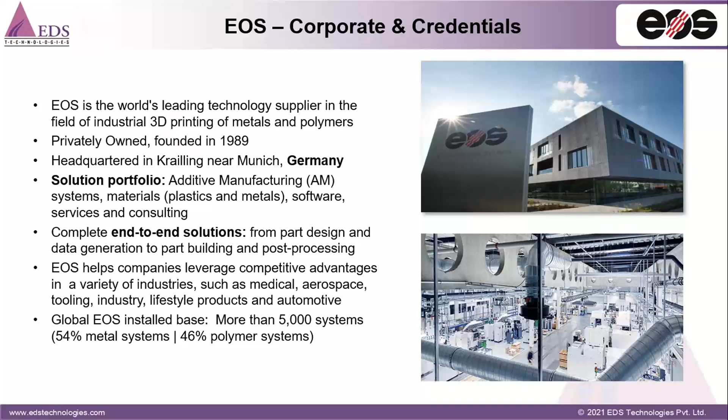Here I just want to emphasize one more point. They recently started a new plant with a capacity of 1,000 systems per year to address the market needs and increasing demand across the globe. This setup is now serving not only with machines, but also giving certified equipment to customers based on country needs.

I would like to introduce how our technology works, the principle of additive manufacturing in our solutions. Here we use the laser sintering process, predominantly for both polymers and metals.

In the laser sintering process, once our CAD model is ready, the geometry model is imported into the EOS AM machine. It has inbuilt software which can read CAD models in STL format, and the complete STL data can be sliced into particular thicknesses. Based on my quality needs, I'll slice the components and print the part layer by layer using the sintering process.

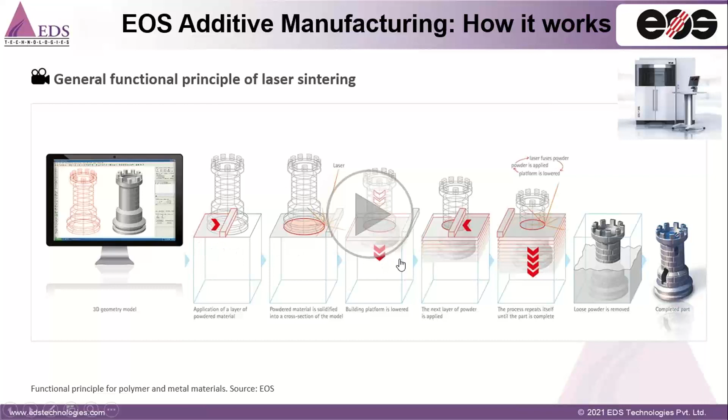So here you can look at the component. Once I take the CAD model, it will be sliced vertically into different layers. Layer thickness can be defined based on the quality needs and surface quality requirements of the parts. Once the component is ready, the machine will read the first cross section of the part and start building the component step by step. Let me illustrate this.

First, look at the chamber, the powder chamber. Initially the powder coating, the material powder—it could be metal or plastic—will be spread into the chamber, which we call a recoat. Then we warm up the material to a particular temperature. In the case of plastics, I'll warm up the chamber, since the utilization of the laser alone is a costly affair.

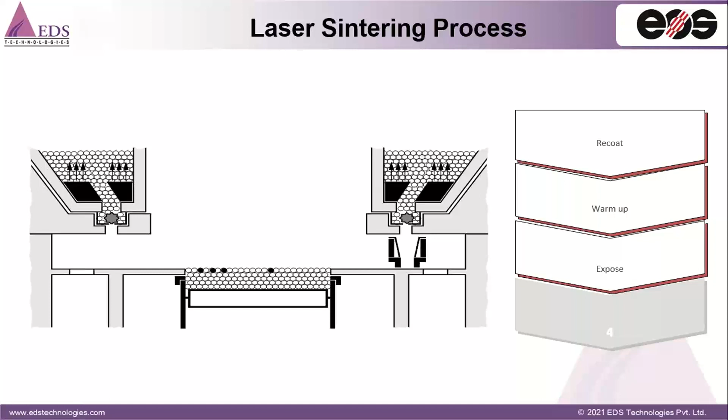So what we do is preheat the materials to a particular temperature based on the material characteristics, and then start using the laser by reading the cross section from the CAD data. It starts exposing the laser on top of the material, which melts it. Once one layer of the cross section is built, the build chamber goes down by another layer, and material is spread on top of the first layer. Then the laser process happens again, and both layers solidify together.

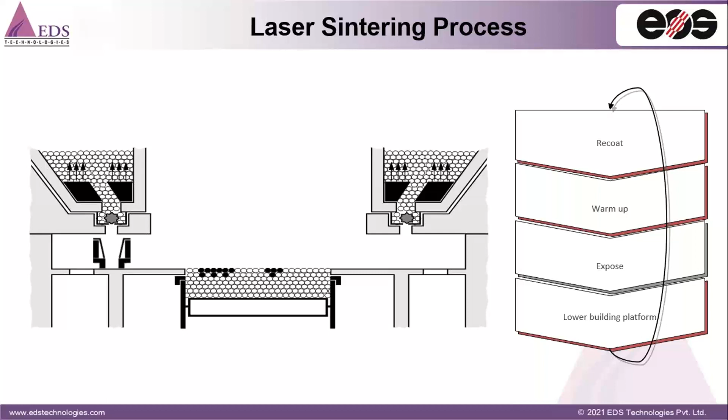The complete component is built in the chamber. Once my component is ready, I remove the part from the chamber and carry out post-processing activities. So in short, that is our principle of working with laser sintering technology.

I would like to emphasize why additive manufacturing, and what the roads to success with it are. First, the major challenges with conventional manufacturing: one is we have to work with limited complexity. I cannot produce the component the way I think or the way the part demands—that is the key problem with traditional or conventional manufacturing methods.

The second challenge is the number of operations—because of limitations, I may need to produce more parts to carry out assembly processes. To eliminate that, here's an example from Hettich: the washing rotor, a 32-component assembly, is built with just two laser-sintered parts plus one steel ring. We completely eliminate assembly processes by printing, because there's no limitation on printing complex parts with AM technology, unlike conventional methods.

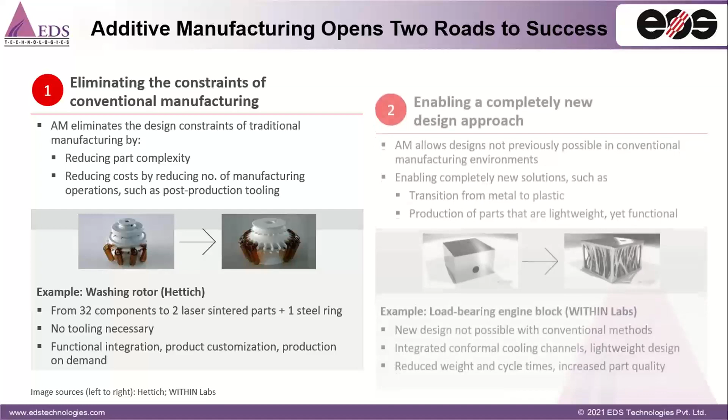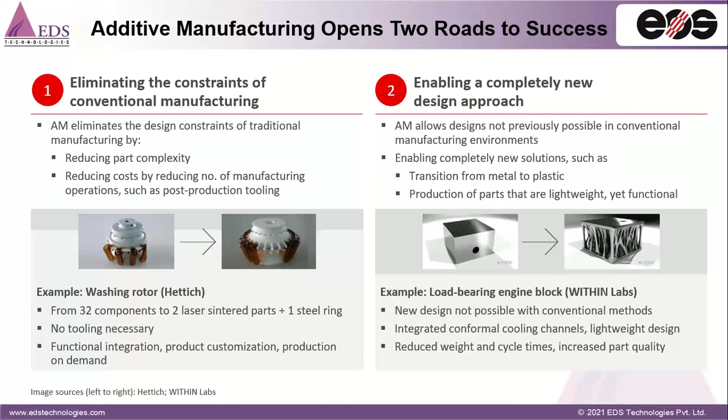Second, AM enables a completely new design approach. When I have the freedom to print any complexity, I'll take the chance to carry out optimized design based on product demands and needs. For example, the load-bearing engine block from Within Labs—this new design wasn't possible with conventional methods because they'd exhausted optimization with the traditional process. So they decided to build this part with additive manufacturing, which allows conformal cooling channels integrated within the part, bringing it to a lightweight design. This is one of the key advantages: there's no limitation of complexity, and I can optimize the part as the product needs, then print it using this technology.

So next, from idea to product with the EOS. I want to give you the brief process of how the entire cycle will be carried out using our technology. From the CAD perspective, we all know the basic idea will be generated from either marketing or R&D.

From the idea, the component will be designed using CAD/CAM technologies, and we will be carrying out simulation activities to ensure certain parameters are met by the product. This is our traditional, existing process.

The machine comes along with software where I can optimize the printing, optimize the time, as well as optimize the materials. So a complete package is provided to the customer during the processing time as well as the post-processing time.

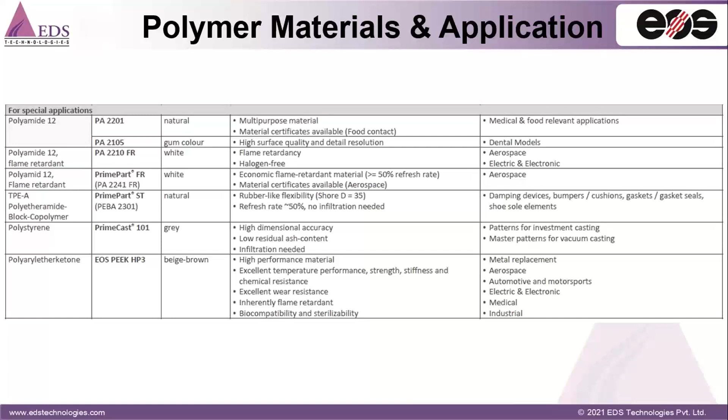Additive manufacturing offers unique solutions. Manufacturing organizations are facing different challenges. The primary challenge I keep hearing from our customers is time to market with shorter life cycle - this is one of the key challenges in the current demanding market situations.

And the productivity increase, then flexibility in terms of production, then innovation. If you carry out innovation, there may be multiple iterations. These iterations cannot go with the traditional process to build the part and verify it or value-add the parts. So our technology allows innovators to quickly produce parts and finalize designs.

And then customization of parts - I'll cover this area in a couple of slides. And then additive manufacturing advantage - there are industry challenges, and how we overcome those challenges using our additive manufacturing.

The first point I'd like to emphasize is freedom of design. What the product demands, irrespective of complexity, I can create my design and finalize it, which will be printed through AM technology, allowing you to work with a light part.

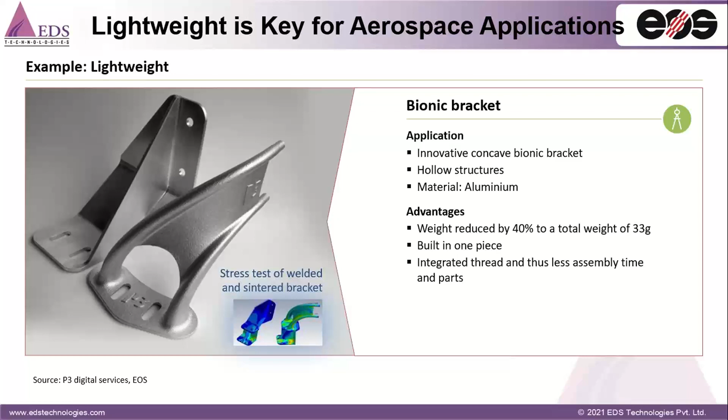This is one of the recent case studies we got from Airbus - a weight-saving partition. Normally you may be looking at the flights, the partitions. There are many parts being printed with our machines, where they can see huge cost savings, and especially they are talking about CO2 emissions reduction by using this technology and redesigning this particular area of work with the A320 aircraft. This is in the approval stage, and probably in the coming years they will be implementing it in their A320 planes.

One point I want to highlight: look at the build chamber. Many components build in a single print. That's the beauty of our technology. In case of metal parts, we may require support structures to build the parts, but when it comes to plastic parts, you may not require any support structures, because the powder itself behaves like a support material for the components.

Using this laser sintering technology advantage, I can orient the parts horizontally as well as vertically, as many components as I can, in one build. So let's say I'm buying a 200mm by 200mm machine. It's not necessary that I print the complete size of the component. I can print multiple shapes, multiple sizes in one build. That's the advantage, where you save loading and unloading time, as well as post-processing time, when building in a single build.

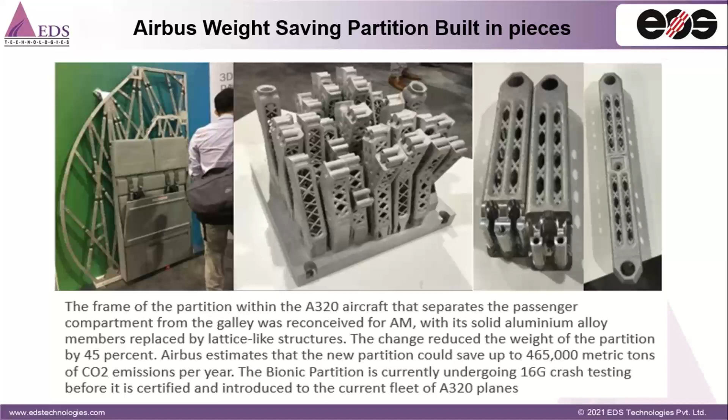So this is one of the classical case studies where quantity doesn't matter, but quality as well as functionality matters. We have a very good footprint in these kinds of challenging situations.

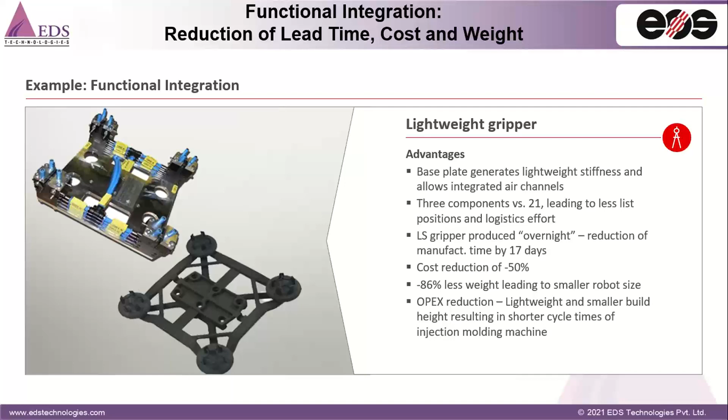So this is another area - medical. Again, there is a considerable change in terms of market expectations. Especially when talking about medical, there are different areas to work with in medical segments. One is on the implant side, second is on the dental side, where we have a lot of case studies, because they need bio compatible materials since it's going to be used inside the human body.

So there are a lot of standards where we will be meeting customer requirements with our metal portfolio. This is Ottobock, one of our customer case studies, where they were able to print a custom orthosis part for one of the patients with our EOS P 396 machine, using PA 1101. This is a medical grade material, and it allows the patient to use custom shaped components or a custom shaped shoe for his requirement based on doctor's advice. This is one area where we are having key contributions in the industry, and there are many bio compatible materials that have been accepted and certified, which we recommend our customers to use.

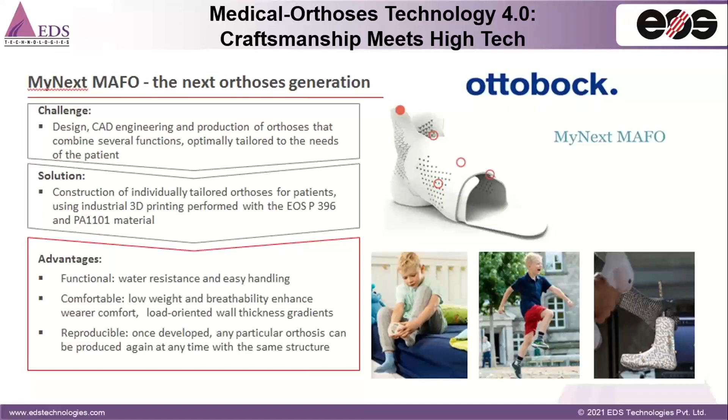So this is one of the classical examples I would like to emphasize, like the conversion of metal to polymers. There is significant activity going on in the industry, and we are seeing huge benefit using our EOS machines in this area by using our PEEK materials.

So I was talking about this in my earlier slides. This is one of the case studies where we have a small 20 parts assembly, brought it down to 2 parts, which is a huge saving. The cost per component was about €20, brought down to €8 per piece. This is the key advantage with our technology and material grade, like our PA 2200 grade here. This is one area where we are emphasizing to customers to optimize their designs from metals to plastic.

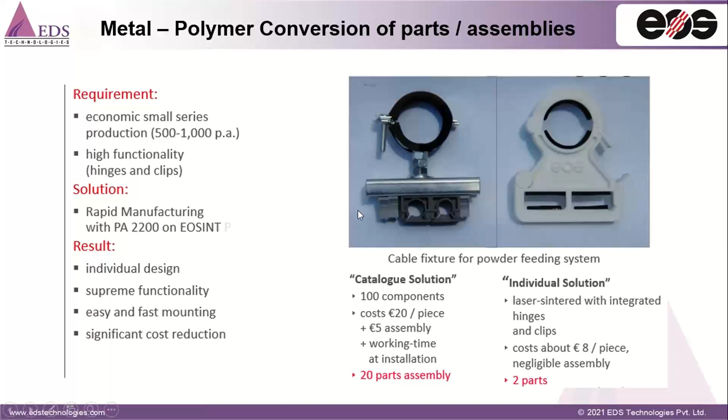So next comes the value add services. One is having the printer, and the second is getting the support. When you are working with different application requirements, you may have different challenges, and support will be required in installation as well as qualification of the part, and material support may be required, which is taken as part of our technical support services.

And then training, whenever the customer buys the machine, as well as prints using the machine, they need a lot of hand holding initially until things streamline. So our team will be emphasizing customers to go through our trainings and build their competency so that they can individually run the machine with different application needs of materials as well as parts.

So next is additive minds. Irrespective of what machine I am using and what competency I have, there is always scope for improvement. So we have a key role here. This additive minds is the sister concern of EOS company, where they will be looking at different customization requirements.

Let us say I have a particular application requirement with new material grades. This company will work very closely with EOS customers, and support them on specific requirements, or let's say if I want to build a component of 1 meter, for example, which I don't have in my portfolio, additive minds will be designing the machine for you and build the machine which suits your particular requirement, like a concept of SPM, and that will be recommended to you to buy.

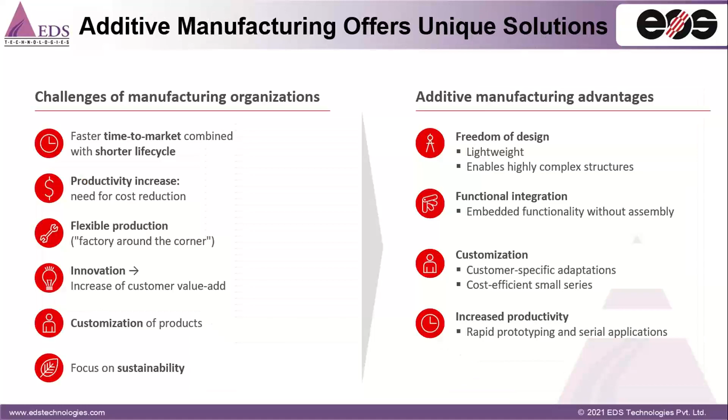Another question: how would you justify the mechanical properties of metal prints? So, going back to the previous slide, here you can see the EOSTATE Monitor software. This software monitors the component while printing. As you print layer by layer, each layer is scanned and monitored by the EOSTATE software. If there are any disturbances or discrepancies in the process, the software will tell you. There's also a provision to customize the software for quality. Some customers take these solutions to support quality testing - what material and part quality properties are being printed under certain conditions. So if I'm using a certain set of parameters and particular materials, I can expect the quality of the part well in advance. That is the beauty of the EOS software.

Another question: what will be the cost of AM printing approximately 1 centimeter by 1 centimeter? I don't have much idea on this. Maybe my sales team can get back to you with the details.

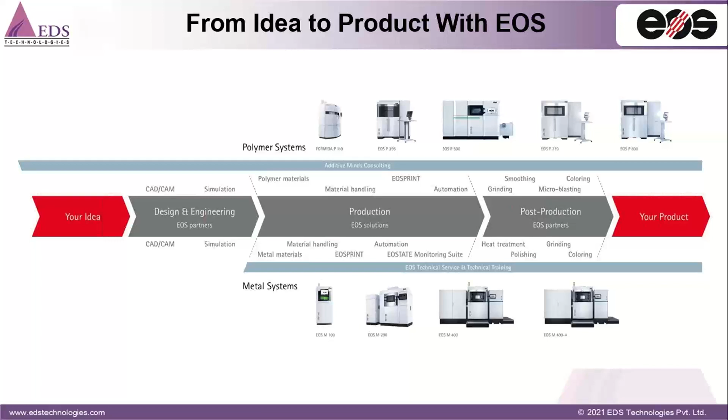Another question: is there any limitation on size in additive manufacturing? Obviously, the capacity of the machine - when I was showing the product portfolio, I was talking about the sizes of the machine. You can look at this slide - the maximum build component size I can print in this machine is 400 by 400 by 400. That means if it's beyond 400, I cannot print it.

So what we do is, in some areas, we split the component. I was taking the example of tire design - if you look at it, the tire may be 1 meter in size, which I cannot print directly with a 400mm machine. So what we do is segment the tire to allow the part to eject during the molding or vulcanizing activity, and we print those segments.

For example, with the EOS P 396 machine, we printed a car bumper which may be around 2 meters in size. So what we did is split the component, given assembly ribs to lock the component once printed, and carried out post-processing activities - because the customer just wanted form fit into the vehicle for testing, not functional, just form fit requirement. So in such cases, even with a smaller machine, I can segment the part, print multiple segmented parts in the EOS machine, and assemble them for functional as well as form fit requirements - especially aesthetics and form fit requirements.

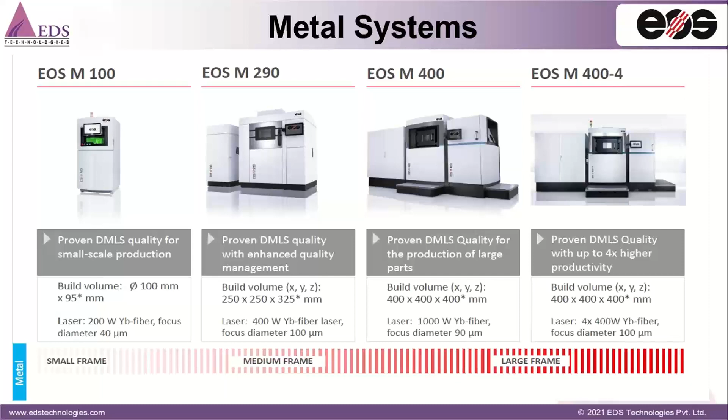One attendee has asked you to repeat the tire example. Okay, I'll go to that slide.

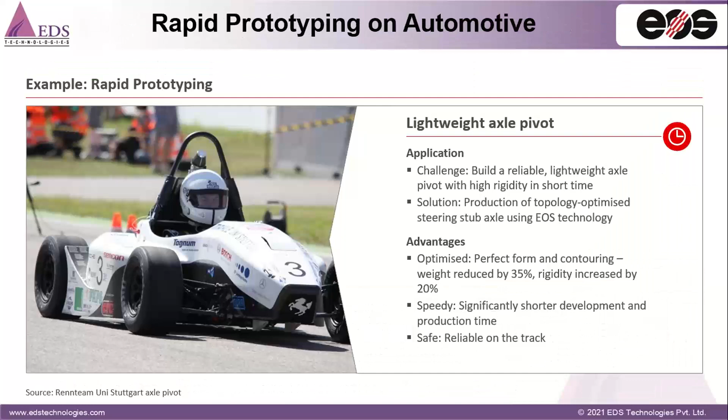The example we are working on with one of our customers is manufacturing the sipes. They have two key challenges. One is that printing the complete mold for a tire is taking too long, in terms of cycle time, since they procure from different countries. One customer was talking about Taiwan and China, another about Spain. Some customers procure the sipes from Spain, where they have exclusive partners supplying the parts.

Normally, procuring a complete mold takes a 3 month cycle time. In case of sipes, it takes 15 days to 3 weeks, and normally they use 100, 120, or 150 sipes in each tire mold. For that kind of production quantity requirement, some customers are already following the process of press tooling. But press tooling will not give you the taperness inside the sipes.

So what they are doing is using our technology to print the sipe parts directly using our EOS technology. At a time you can print 100 parts if you have the bigger machine with you. That's the advantage - irrespective of shape, size, or thickness, you can account for the taperness and print the parts using AM technology.

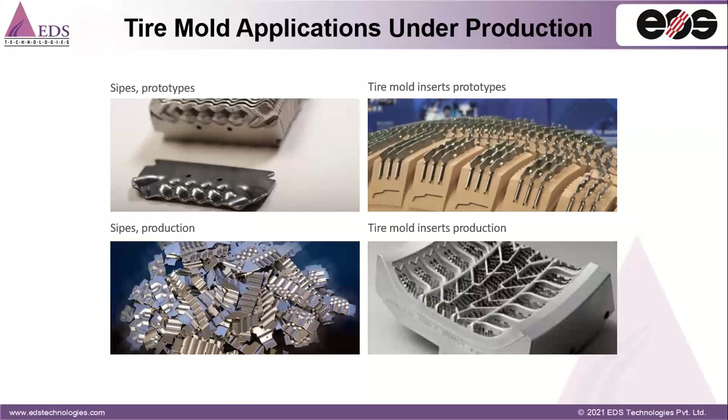Another question: what about printing conductive materials like copper? Yes, it's possible. There are a few grades available within our portfolio - going back to the material list of metals, here is our standard portfolio. But if you want to produce copper or zinc-based materials which are not in our portfolio, our technology will still support those kinds of materials. That's the advantage - you can choose any third-party vendor who supplies by specifications given by EOS.

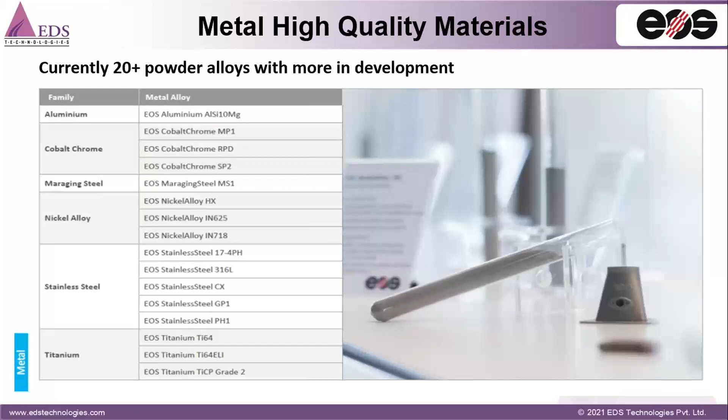Another question: how is the aesthetic look in additive manufacturing? Probably I was showing some of the metal parts in the slides. Let me see - this is one of the metal parts.

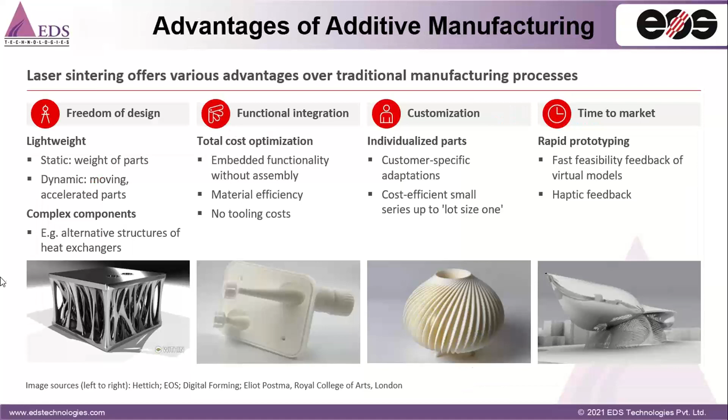This is one of the metal parts. Look wise, you can see this dental geometry and the surface finish. Normally, if you want to produce the component quickly, you can use a higher layer thickness and print it faster, but you'll have to compromise on surface quality. By default though, it will be a smooth surface finish. You will not see the layer lines. It may look like layer lines or steps, but it isn't really. It will be like a smooth surface finish.

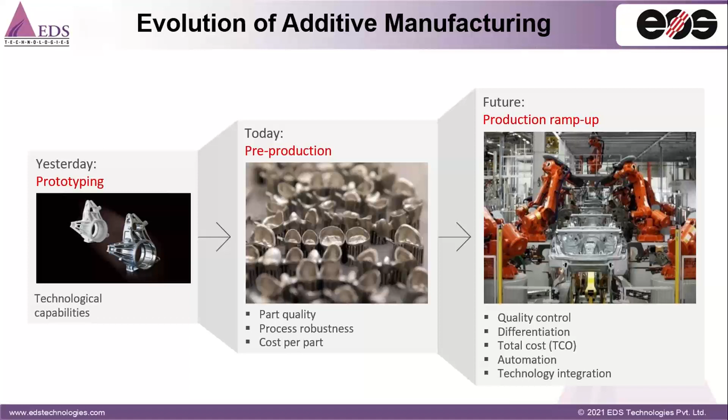We have another question. Whether the EOS machines are based on SLS method only or any other AM methods also? Repeat again, Abhay: whether the EOS machines are based only on SLS method or any other AM methods also?

Yes, yes. In case of polymers, we have two portfolios. One is Sintratec and second is EOS. Both portfolios use the SLS technology, selective laser sintering technology.

Another question: what is the maximum size of the tire mold that can be made? As I told you, they will not print the complete tire in one stretch. They segment it, because once the component is molded, it has to be ejected from the mold. So what they do is segment the complete mold. Once the mold opens, the tire will be taken out. Based on the segment size, predominantly I am working with one of the car tire requirements that can suit our M290 machine. So the size of the component is about 250mm by 250mm. It depends on what sizes they are segmenting based on their manufacturing requirement. Then we will suggest the customer what size of machine can be purchased based on the size as well as the material needs.

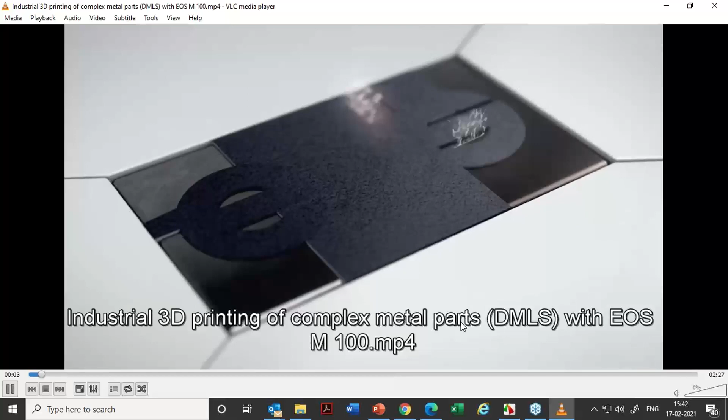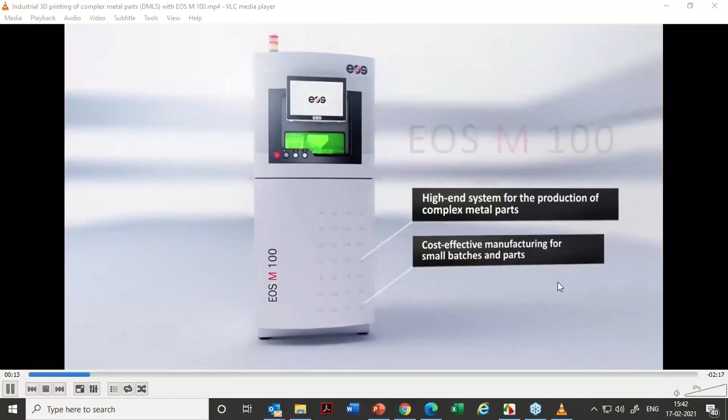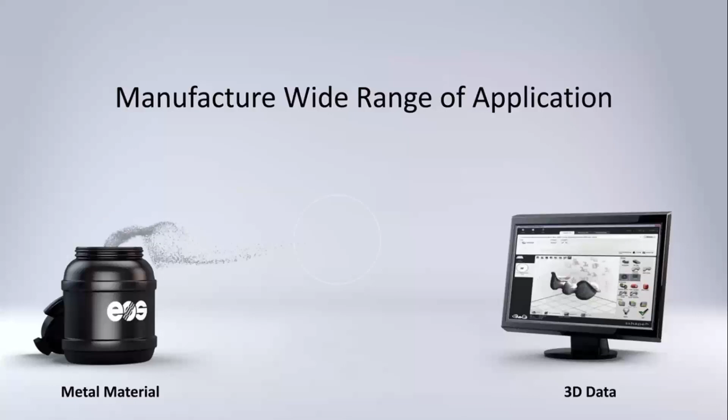Yeah, you can see the video, Abhay. Yes, so this is our M100 machine. It's a metal machine. Sorry to interrupt, please make it full screen. Yeah, sure. Is it okay now? Yeah. So this is actually the M100 machine.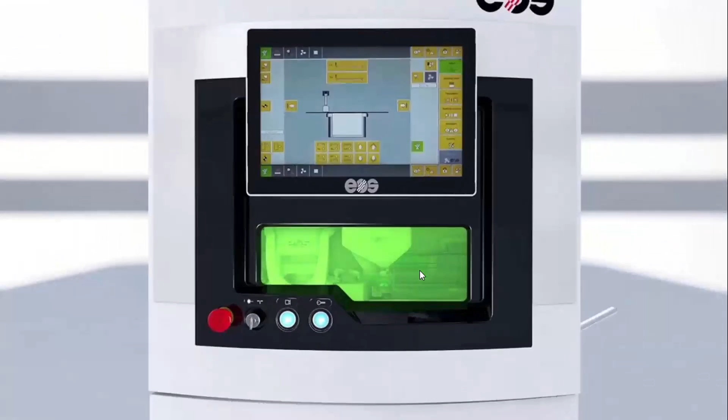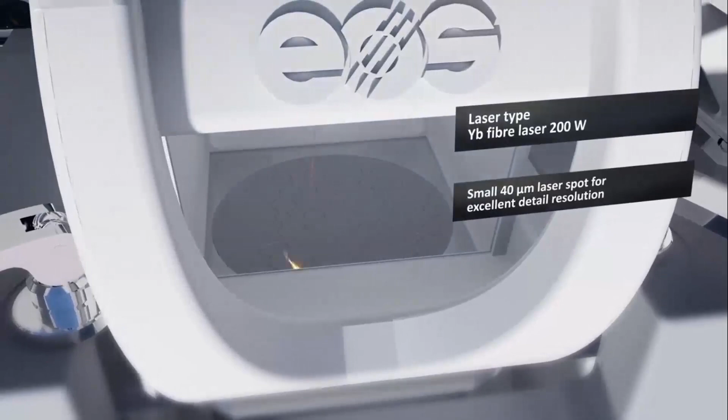Compact in size for producing smaller components, especially aerospace components and medical implant related components. The machine usage as well as utility will be very easy. It's a completely dust-free environment in which you can run the machine. So you can insert the component material powder. He's inserting the chamber now on the build plate on top of the chamber, and then powder coating is happening currently. So the laser is realizing the cross section of the component based on the slices given by the CAD data. It started melting the material wherever there is a cross section.

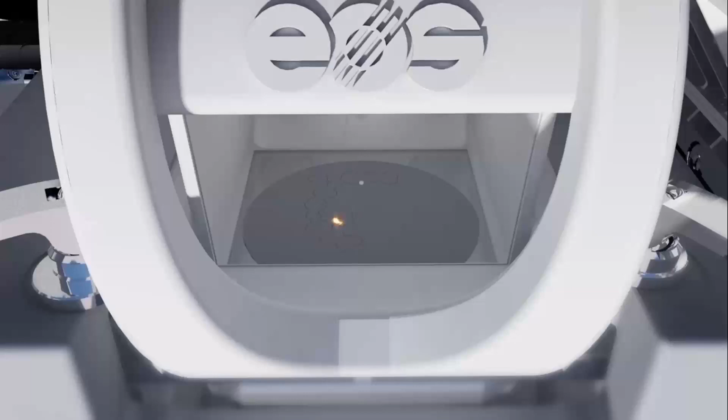Then second coating is happening. So free powder, empty powder has been spread on top of the build chamber again, and then the laser again started melting the powder. So solidification will be happening from the previous layer to the current layer.

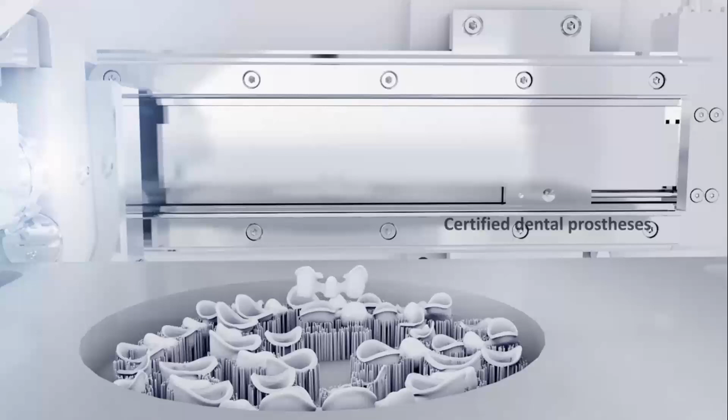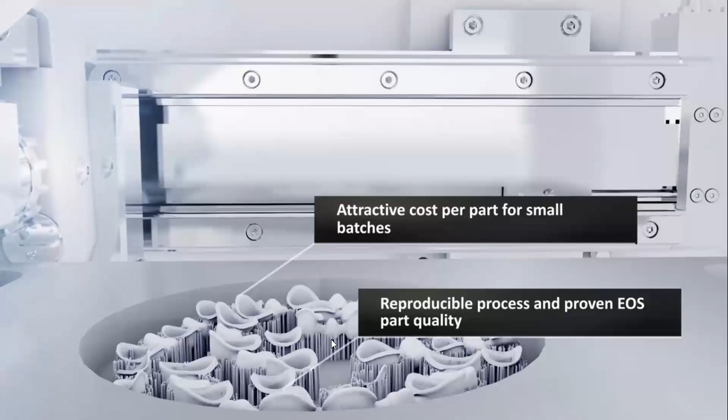So once the component is built, I'll be removing the excess material. There will be free float powder that will be removed from the chamber. So you can see here the small vertical needles kind of thing - it's a support structure, I can say. Support structures are not reusable based on the component geometry. We will be giving minimum support structures because that also adds additional cost to the component.

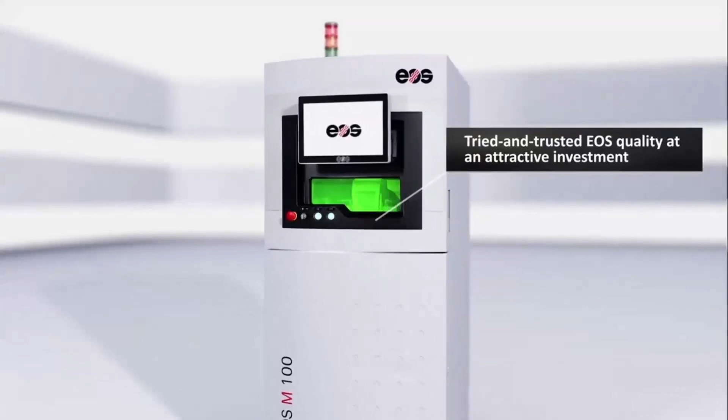So this is an introduction about the technology, how it works. And you can go to the eos.info website where you will have a lot of case studies based on your industry vertical, as well as couple of videos. On YouTube we have a separate channel for EOS, so you can watch many customer case studies, customer videos, and the pre and post processing activities. They've been available on the YouTube portal.

We have one other question: what are the different polymers used in additive manufacturing?

Different polymers - our material grades are predominantly on top of nylon, polystyrene, PP, and PEEK. So there are engineering plastics if you want high performance requirements, whereas other material grades like PP are predominantly used for aesthetics requirements.

We have the complete portfolio - almost 15 to 20 varieties of materials. We also have partners who can supply materials based on specific needs. If a customer expects an ABS material, we have grades which give equally similar strength to ABS or PC. So we have a vast portfolio. We can share the material portfolio brochure once you give us your mail ID.

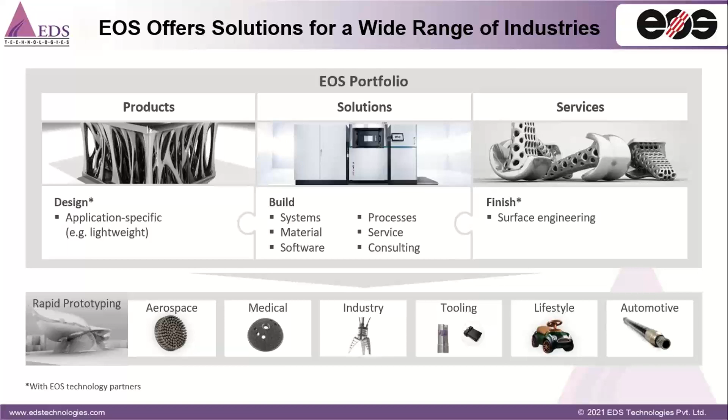Eventually there are a couple of case studies - one I have covered in this session. There are some automotive top players coming up with AM setups for printing batch sizes - if they want to produce 1,000 or 5,000 components, they want to use our AM equipment instead of going ahead with a big plant setup for multiple operations. So it's getting converted into the production area now, and we already have a few case studies in place.